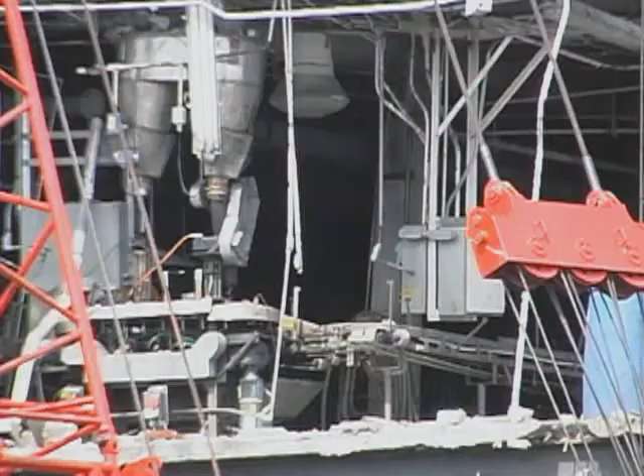Explosions raced through the buildings, fueled by accumulations of combustible sugar dust and sugar that had spilled from equipment. Thick concrete floors heaved up, and brick walls were blown into stairwells and work areas, blocking many exit routes. Fires spread rapidly.

8 workers died at the scene. 6 more died later at a regional burn center. Dozens of others were injured. The plant's massive sugar-packing buildings were a total loss.

The accident at Imperial Sugar was the deadliest industrial dust explosion in the United States in decades. It highlights the extremely serious nature of combustible dust hazards. There were significant accumulations of sugar dust and spilled granulated sugar on surfaces throughout this facility. Conditions were set for a catastrophic accident.

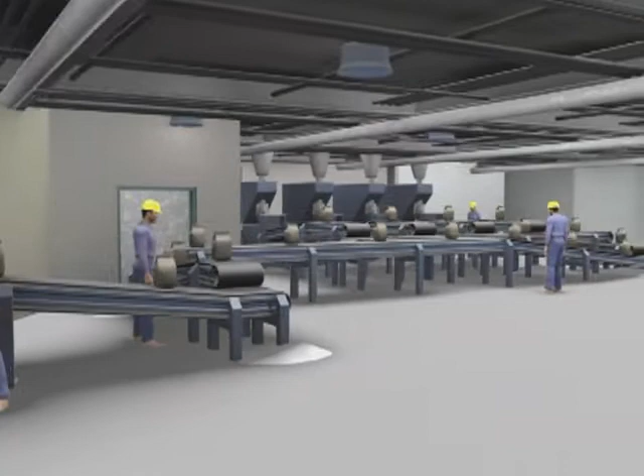Imperial Sugar's sprawling Port Wentworth complex began operations in 1917 and grew to become one of the largest sugar refining and packaging facilities in the U.S. Granulated sugar from the refinery was stored in 3 100-foot-tall silos and then conveyed into packing buildings where it was packaged for distribution. Granulated sugar was also converted into specialty products, such as brown sugar and powdered sugar.

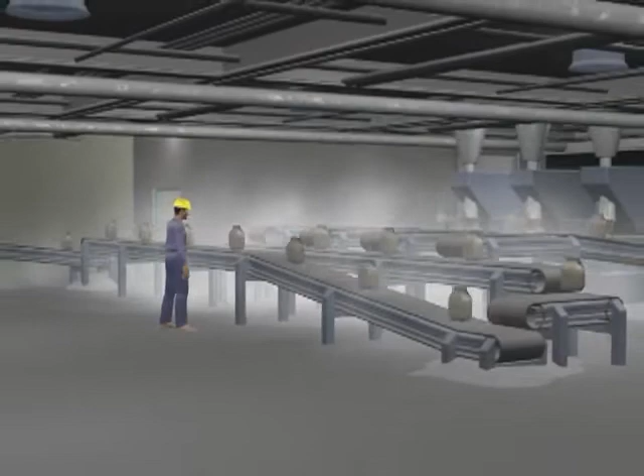Sugar was transported by a complex system of bucket elevators, screw conveyors, and conveyor belts. During this process, sugar spilled onto floors throughout the work area. In places, the spilled sugar was many inches deep. This sugar also contained fine particles which became airborne.

In addition, hammer mills were used to crush the granulated sugar into powdered sugar, creating even more dust. The machines were connected to a dust collection system, but it was undersized and in disrepair. And it was not connected to the bucket elevators and conveyors.

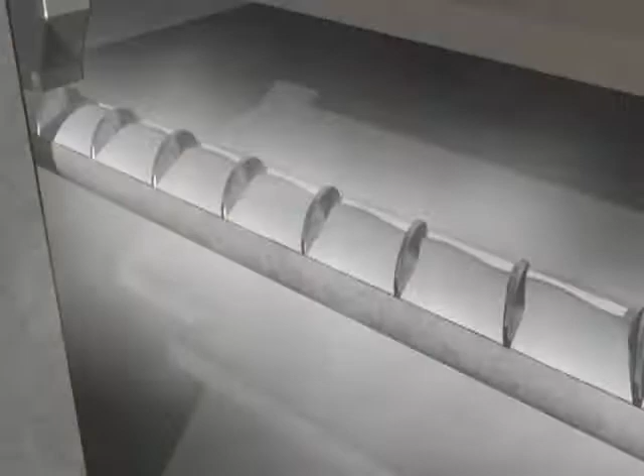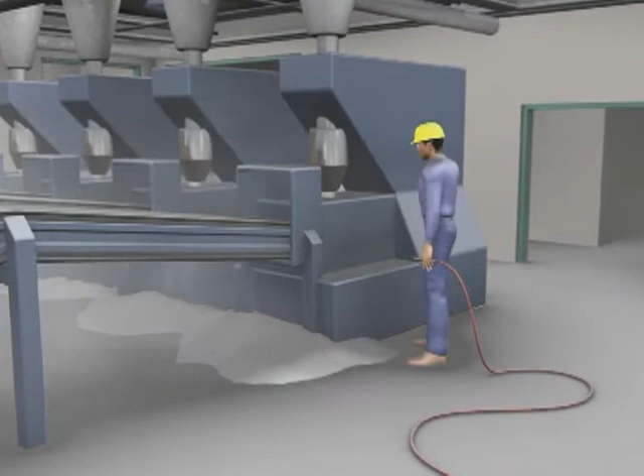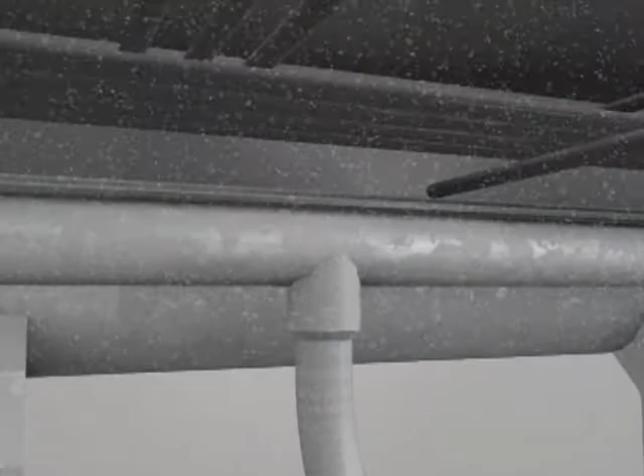Significant amounts of sugar dust escaped into the work areas. Workers routinely used compressed air to clean packaging machines, further dispersing sugar dust throughout the buildings. Over time, large amounts of dust accumulated on elevated, hard-to-clean surfaces, such as ducts, beams, and light fixtures. These surfaces were not cleaned often enough to always keep the dust below hazardous levels.

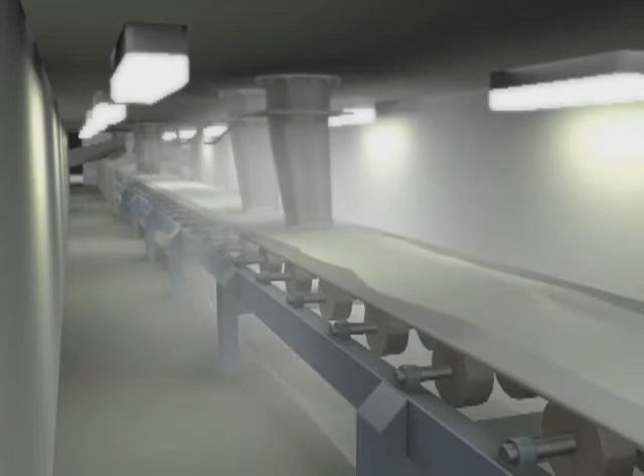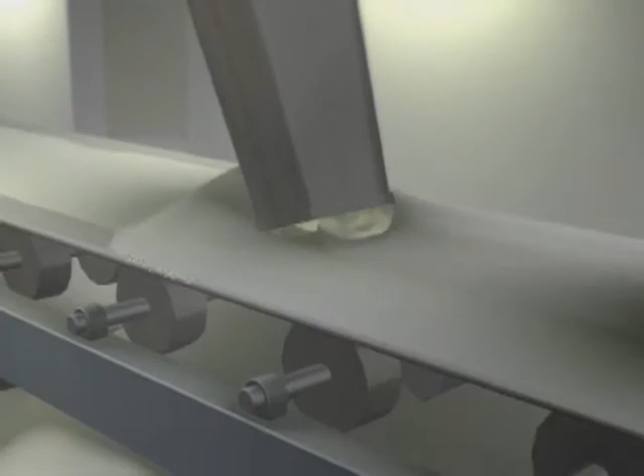In the tunnel beneath the sugar silos, granulated sugar flowed through chutes onto a long steel conveyor belt. From time to time, clumps of sugar would become stuck in one of the chutes, blocking the flow of sugar on the belt, spilling sugar onto the floor and releasing dust into the tunnel. But the tunnel was large and ventilated, so this airborne dust did not build up to explosive concentrations.

However, in 2007, the company enclosed the conveyor belt with stainless steel panels to protect the sugar from possible contamination. The enclosure was not equipped with a dust collection system. As a consequence, sugar dust would now be trapped inside this enclosure.

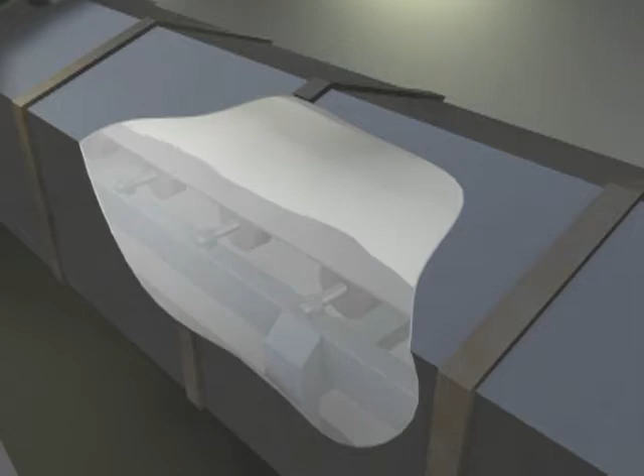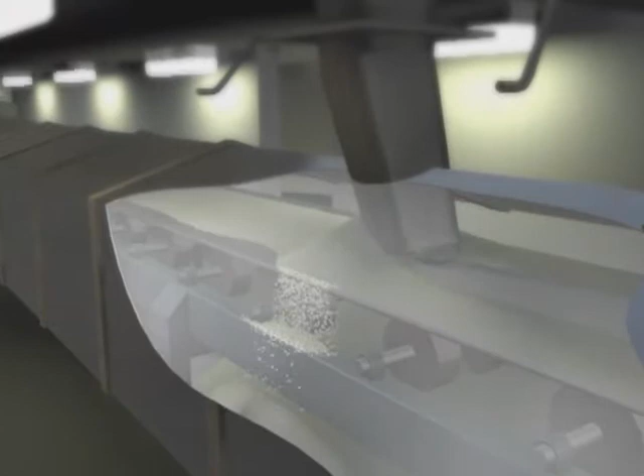On February 7, 2008, clumps of sugar were found blocking one of the discharge chutes. Sugar from the adjacent silo likely spilled off the moving belt. Dust likely accumulated to an explosive concentration inside the enclosure. At about 7:15 p.m., the sugar dust contacted a nearby ignition source, likely an overheated bearing, and exploded.

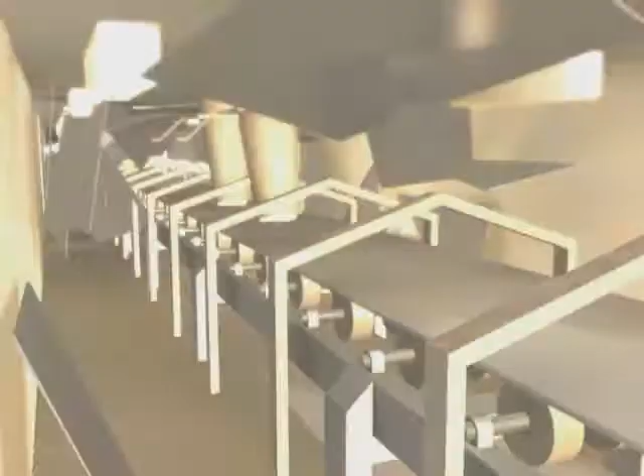This primary explosion blew apart the enclosure and vented into the packing building. Accumulated sugar was lofted and ignited by the advancing fireballs. The dust clouds fueled a chain reaction of secondary explosions, which swept through the buildings.

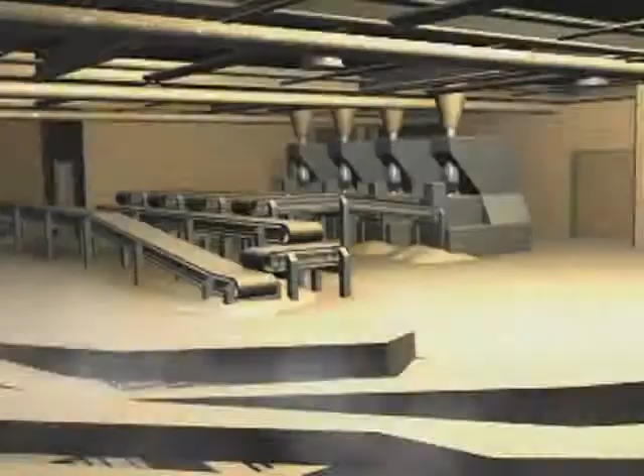Concrete floors buckled, releasing tons of granulated and powdered sugar into the flames. Emergency evacuation drills had not been conducted, and the explosions had cut the power to much of the interior lighting. In the maze of darkened and damaged stairwells and passageways, workers desperately tried to flee the growing inferno.

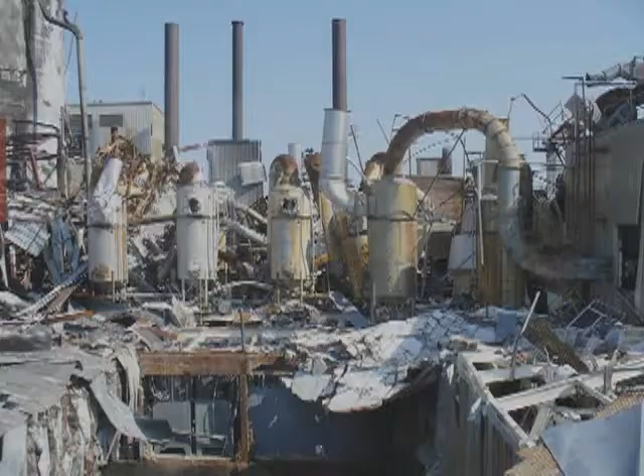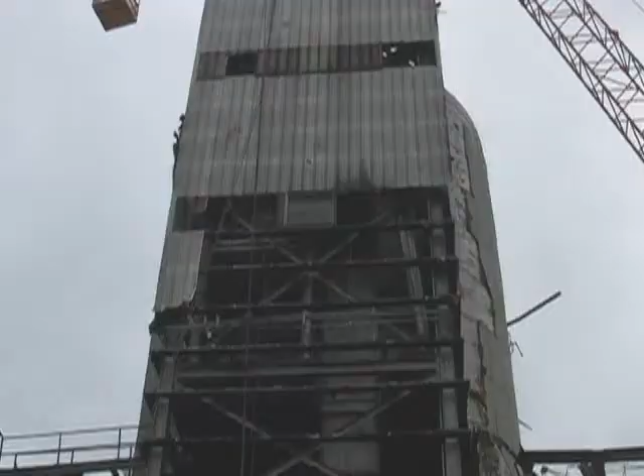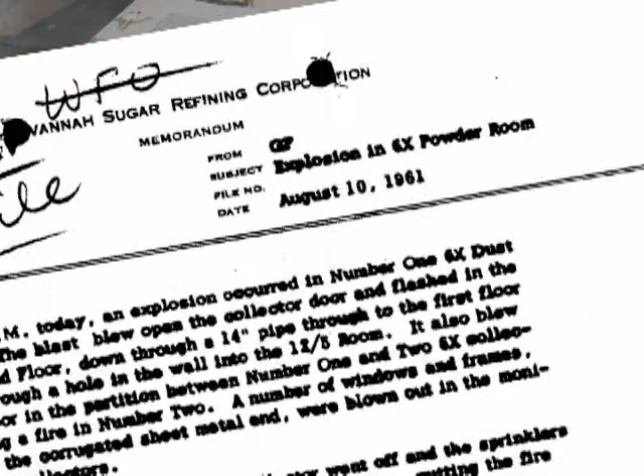The CSB found that correspondence dating back to the late 1950s showed that plant managers in Port Wentworth were aware of the explosive nature of sugar dust and the danger of dust accumulations. As far back as 1961, a memo described a sugar dust explosion that heavily damaged the powdered sugar mill room. Despite the long-standing awareness of the explosive nature of sugar dust, not enough was done to manage the hazard.

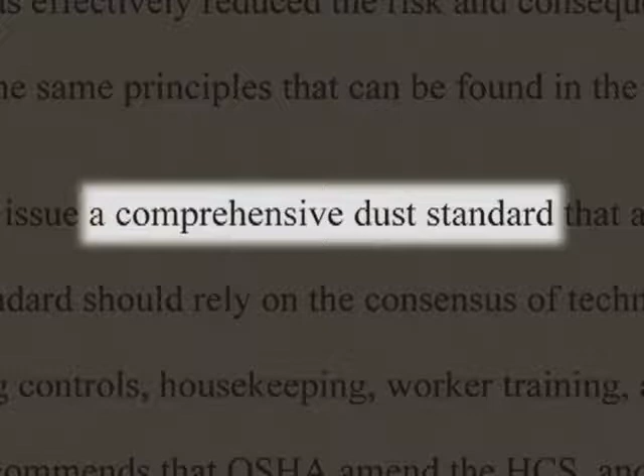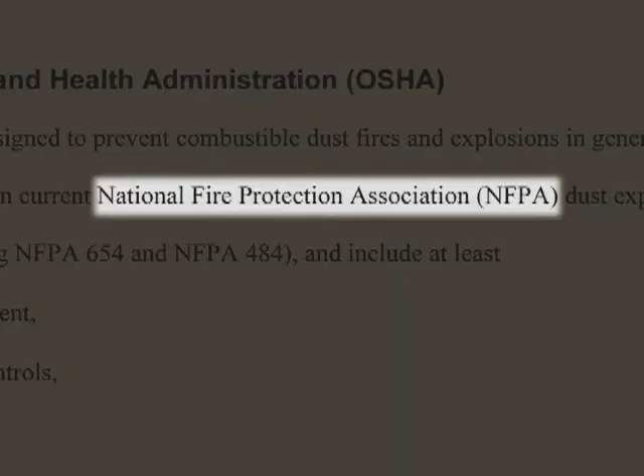In 2006, the CSB issued a study of combustible dust, which called on OSHA to establish a comprehensive combustible dust standard based on the current standards of the National Fire Protection Association, or NFPA. In October 2007, OSHA began implementing a new national emphasis program to increase the enforcement of existing regulations related to combustible dust.

Imperial Sugar learned of the OSHA Combustible Dust National Emphasis Program 4 months before the devastating explosion at Port Wentworth. But management did not act effectively to control the serious dust problem in the packing buildings. Less than 2 months before the disaster, an internal inspection showed that many tons of sugar were still regularly spilling onto the floors. This provided much of the fuel for the massive secondary explosions and fires.

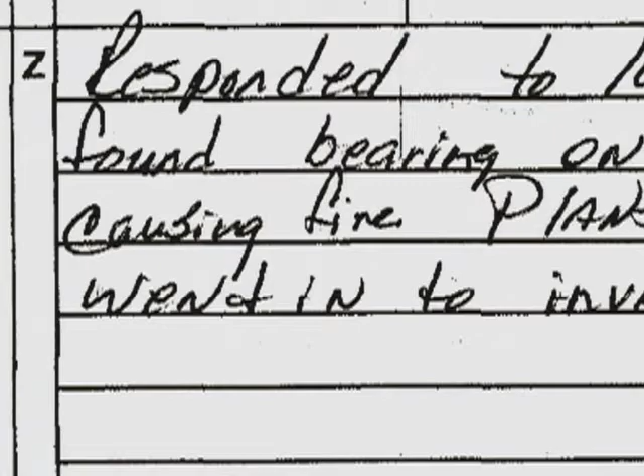The CSB found that over the years, the Port Wentworth facility periodically experienced small fires fueled by spilled sugar and accumulated dust on equipment. But none resulted in a sugar dust explosion that propagated through the plant. Investigators said that decades of operating without a catastrophic explosion may have lulled managers into complacency.

In its report, the CSB issued the following recommendations to the Imperial Sugar Company: Apply NFPA standards to the design and operation of the rebuilt Port Wentworth facility. Develop and implement comprehensive combustible dust control, housekeeping, and training programs. Improve emergency evacuation policies and procedures.

Companies can go a long way to control combustible dust within their own facilities by following the existing recommendations of the National Fire Protection Association. But it is also time for a comprehensive federal standard on combustible dust.

In April 2009, OSHA announced plans to begin rulemaking on a combustible dust standard for general industry. In its final report on the Imperial Sugar accident, the CSB recommended that OSHA move forward expeditiously with the new standard. Without regulation, enforcement, and education, workers will continue to be at risk from catastrophic dust explosions.